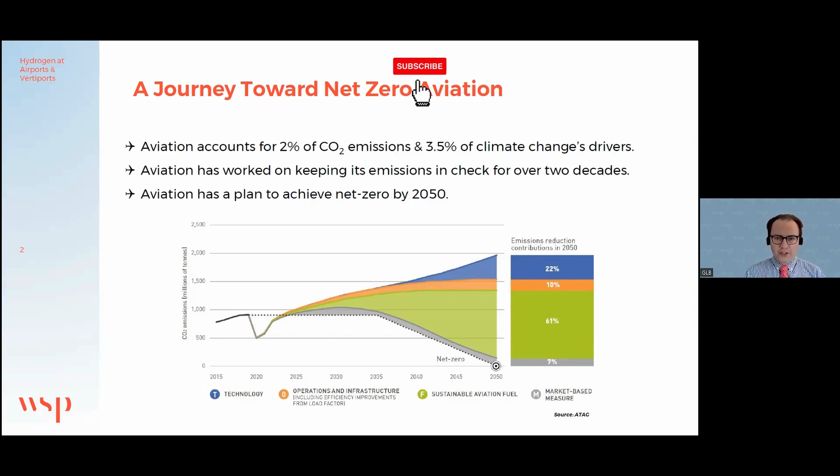Now if we look at the individual market segments, hydrogen could have a role to play in various different markets. Of course, electric propulsion systems - you're all aware that to do electric aviation, you can have a battery electric aircraft or fuel cell hydrogen electric aircraft. With advanced air mobility and also small general aviation aircraft, I think that's understated. Electric propulsion systems can really help the GA community decarbonize and also solve other issues, like lead emissions. So hydrogen fuel cell technologies can power electric and hybrid propulsion systems, EHPS. But also on the long-term horizon, hydrogen could be an alternative to traditional jet fuels and be burned in gas turbines, turboprops, or equivalent to our contemporary jet engines.

So, of course, we have all of these great aircraft technologies being developed, but that's not the end of the story. If you come with your brand new aircraft at the airport, and if the infrastructure, not only brick and mortar, but also policies and so on are not in place, well, hydrogen is just going to fail. So in order to have that aviation hydrogen ecosystem bloom and succeed, we need to take into consideration the infrastructure aspects of it and make sure that airports are hydrogen ready.

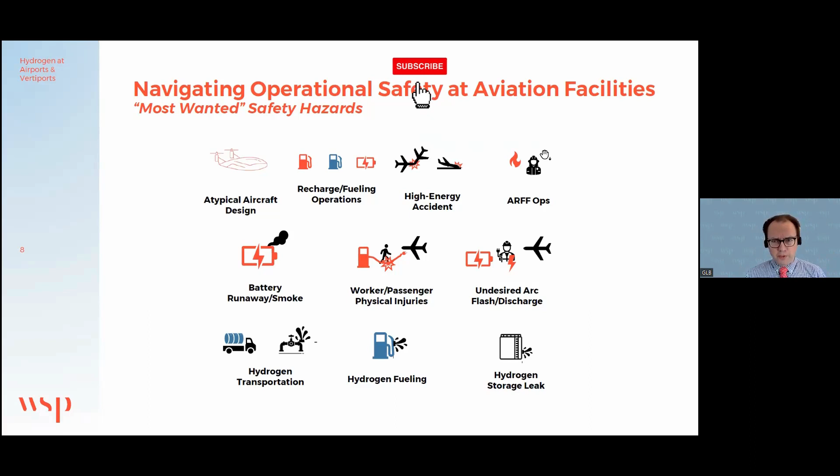Here you have that mapping of our most wanted safety hazards from atypical aircraft design. That's not hydrogen specific, but a lot of aircraft potentially using hydrogen as a fuel or energy vector to electricity have atypical aircraft configurations down to hydrogen storage leaks, for instance. Not saying this is hydrogen specific or that hydrogen is unsafe, but we need to address these into standards, practices, recommendations, and lessons learned, in order to make sure this happens in a safe and efficient way. I'm not going to go into details for each one of these most wanted, but I'm just going to go through three of them.

Number one, everything about hydrogen storage and distribution. For the general public and part of the aviation community, the moment you talk about hydrogen in aviation, a lot of people scream Hindenburg, right? This was nearly one century ago with a very specific aerial vehicle and an accident that happened in very specific conditions with a ginormous volume of hydrogen stored in very specific conditions as well. We are in 2023. What we're talking about for hydrogen in aviation today is completely different. This is not a balloon full of hydrogen. We're talking about safe hydrogen tank technologies that already exist conceptually speaking.

And what we see in tests involving these kinds of technologies on cars, run through a fuel cell electric propulsion system for a car, is that actually these technologies are so safe that they're even safer than conventional cars running on fuel. It's important to educate ourselves as a global aviation industry, and also to really do the groundwork when it comes to testing and confirming the level of safety of these technologies.

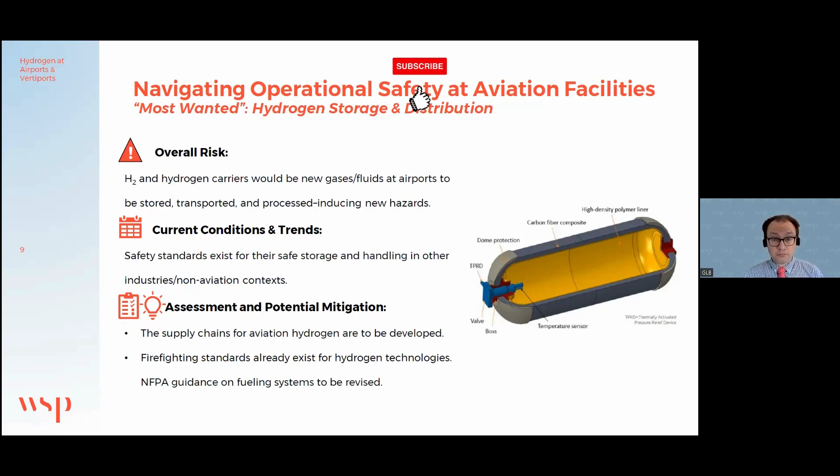We need to make sure that hydrogen on aircraft does not increase the severity of typical accidents. So if we think about a high energy catastrophic event, like the crash of an aircraft onto the ground at high speed, we cannot expect the hydrogen tank to withstand this kind of event and not have leaks, or we're talking about full destruction of the aircraft one way or the other. But here I'm talking about low energy or low intensity events.

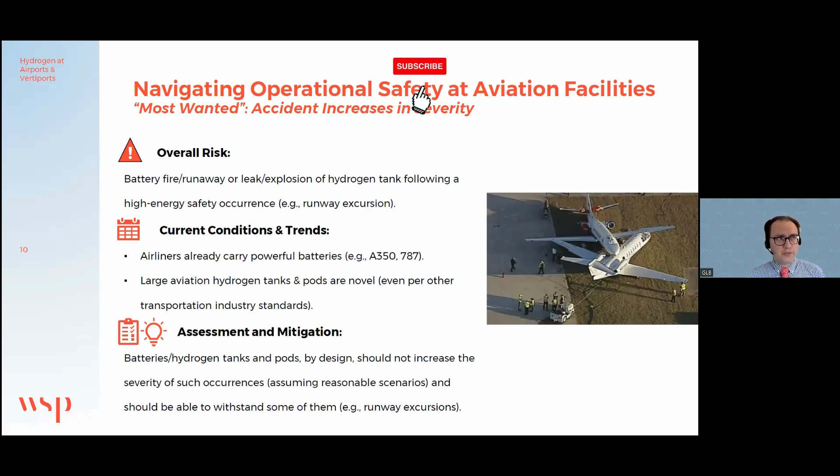For instance, a fuel truck colliding with an aircraft on the ramp, or even an aircraft doing a runway excursion. Today, typically runway excursions are not deadly, they are fairly mild when it comes to the integrity of the passengers and even of the aircraft. So we need to make sure that all these new aircraft technologies involving hydrogen do not increase the severity of these incidents and accidents. This is, of course, groundwork through industry standardization, work with the FAA and other regulators to make sure this happens. But this is doable as of today, based on what we see on the horizon in terms of aircraft technologies.

And one that's more airport or ramp operation specific is everything around atypical configurations. This is not specific to hydrogen per se, but also to aerial innovation generally speaking, is that a lot of these aircraft are not just conventional aircraft with a hydrogen tank in it, we're going to have atypical aircraft design features on it. Even the refueling or container exchange on the ramp is going to be something new in terms of procedures and technical features. We need to make sure that the ramp community and also the broader airfield operations community, including the ARFF staff, are trained and aware of all these new features in order to prevent incidents and accidents from happening in the field.

Earlier, I talked about these four keys to successful implementation. The first one was safety. We just talked about that.

The next one is compatibility. So when I talk about aircraft airport compatibility, it's all about answering that specific question: will it fit? You have an existing airport or vertiport. Will your new technology, your new aircraft type, fit in these operations, this facility, this infrastructure? And if not, what can we do in order to ensure that compatibility?

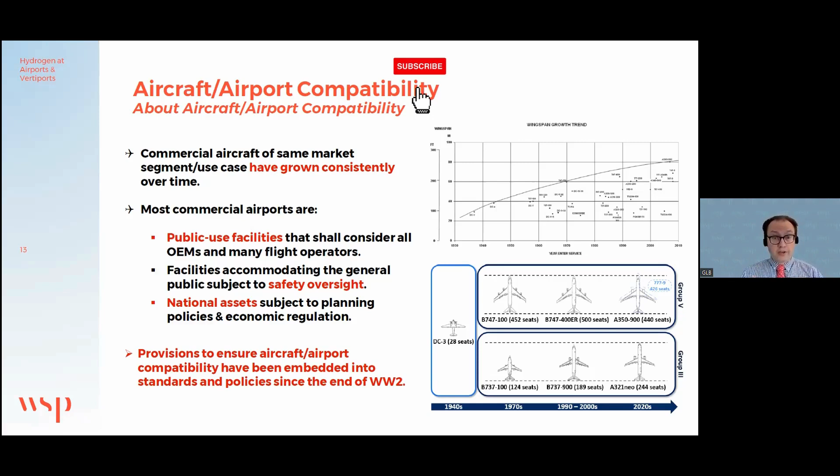We took nearly half a century to develop these forums and this process for aircraft-airport compatibility. We should leverage this in order to have, collaboratively speaking, this discussion between the airport community, OEMs, flight operators, regulators, ANSPs as well — the air navigation service providers — and so on, in order to all together facilitate that integration process.

And again, if you're not convinced that the ground infrastructure is important, I'm telling you, of course aircraft engineering is great, and it's amazing what we've been doing in terms of development of new aircraft design. But if we are not capable of also doing that same work of integration of these aircraft technologies on the ground, and setting the right policies, equipment, and infrastructure, it's not going to work, because these aircraft will not be able to fly anywhere.

When it comes to aircraft airport compatibility criteria, that comes from another research paper we presented at Forum 79 last year. This is a high level overview — the paper details all of these different criteria — an itemization of the different compatibility criteria to keep in mind when we look at integrating new aircraft design and new technologies into the airport setting.

In bold blue letters, I highlighted the areas, the domains, where hydrogen technology specifically might have an impact, or where we need to direct our focus when it comes to discussing the integration of hydrogen technologies into the airport setting.

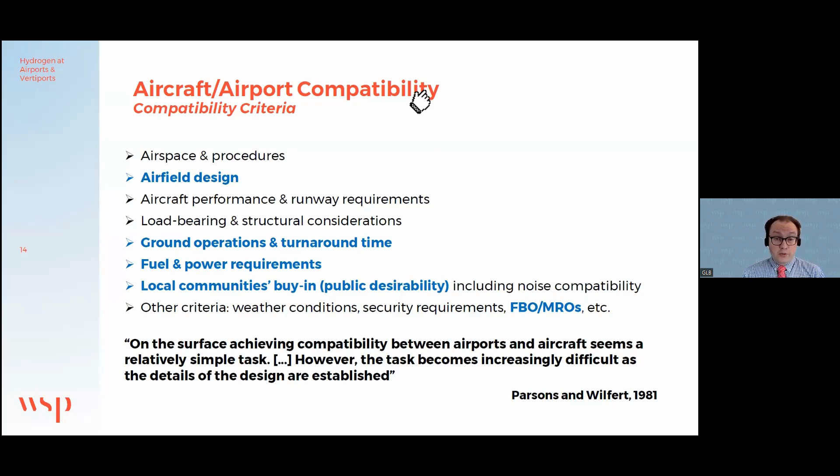And again, aircraft airport compatibility is all part of developing new aircraft technologies and running a new aircraft program. There's this great quote that I borrowed from two gentlemen from 1981 — they were actually part of McDonnell Douglas at that time — and I think they summarize everything when it comes to aircraft airport compatibility. It's at the core of the success, the commercial success and the operational success, of a new aircraft program, I believe.

So how to bring hydrogen to the final aviation user? Basically today, there are two ways to do so. The first one is to bring containers with hydrogen already packed into the aircraft and you swap containers. The second one is to refuel the aircraft with hydrogen from trucks, or maybe at some point in the future with a hydrogen fueling system. Why not? Like we do for conventional fuel at large hub airports, okay?

And of course, a lot of questions behind in terms of airport planning and design, but also supply chain on how we bring that hydrogen from the production site, that could be at some point at the airport, at least for some applications, to the final aviation users. And here also, everything has to be built, right? Because hydrogen is something fairly new in aviation.

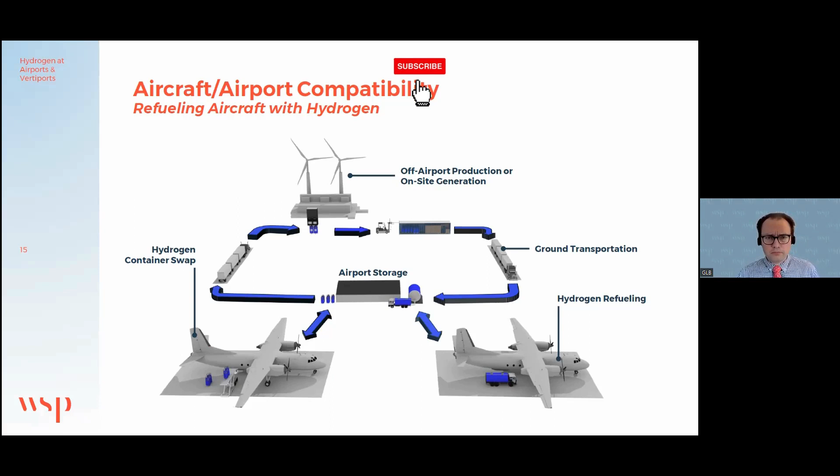In terms of supply chain, I try to keep up to date this graphic along the way. Of course, the purpose of this graphic is not to say that all of these different supply chains have to be implemented at each individual airport. The goal of this graphic is to depict all the different supply chains that are available, being developed, or being thought of as of today, from the production to the final aviation user. And when I keep saying aviation user, it can be an aircraft, it can be a ground support equipment, can be a ground vehicle, or it can be another airport application.

Like for instance, I was mentioning earlier today, potential backup generation based on hydrogen fuel cells, power packs that are based on fuel cells. That's to me an aviation user as well.

And you see that, of course, we can achieve this using hydrogen, but also we can use hydrogen carriers. Here, the idea is that you have another molecule. It's not hydrogen, but it's a chemical compound with a lot of H, a lot of hydrogen atoms on it. And the production and transportation of that hydrogen carrier may be more interesting, or easier, or cost competitive, depending on the market and the use case, than doing the same directly with hydrogen.

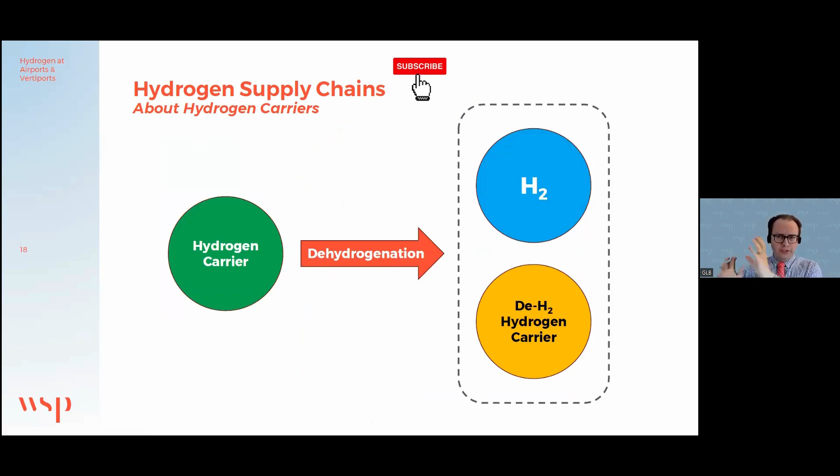You bring your hydrogen carrier to the airport, and at the airport, you're going to dehydrogenize that molecule in order to have on one side your hydrogen, on the other side the byproducts that you might want to use locally for another purpose, or bring back to the production site in order to rehydrogenize all these little guys. So again, this is the high-level schematic version of it. You have your hydrogen carrier, you dehydrogenize at the airport, and you get your H2.

If you don't want to do that, if we want to produce and use directly hydrogen, well today we have a problem. Maybe something like nearly 75% of all the hydrogen produced around the world comes from hydrocarbon reforming. Basically you take a hydrocarbon chain or molecule and you break that at very high temperature in order to extract your hydrogen, and on the other side we have carbon monoxide. That's basically the main process used today to produce hydrogen, and it's not green at all. It consumes a lot of energy. It emits a lot of GHGs.

Now, if we want to go away from that and produce green hydrogen, one first step is, of course, you could try to capture all of that. Still the same process with reforming, but capture the carbon monoxide or dioxide and store it or reuse it. That's what we call blue hydrogen.

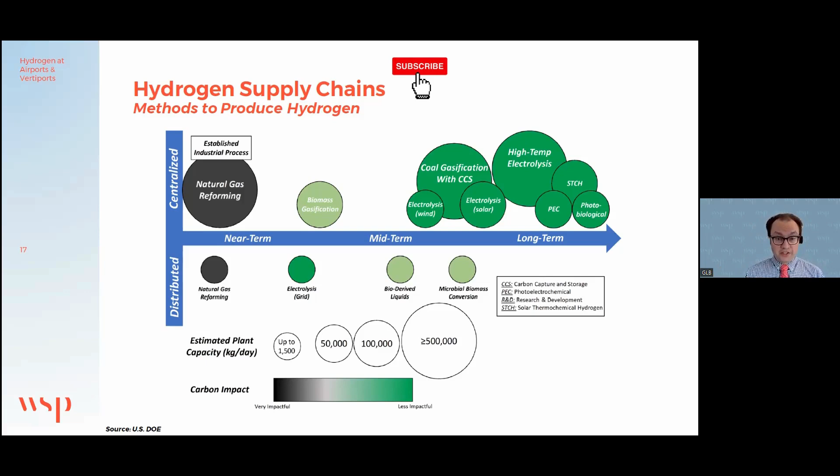And it's not just about counting the H on the molecule. Of course, we have to look at the energy it takes to run that process. We need to look at the cost of the industrial process for producing the hydrogen carriers and dehydrogenizing it at the airport for the final aviation user. We can talk also about the carbon and environmental footprint, and other criteria that can be used for decision-making purposes.

So that's an ongoing project. I don't have findings to share today, but I will be very glad to present during another High Sky Society webinar in the future on our findings.

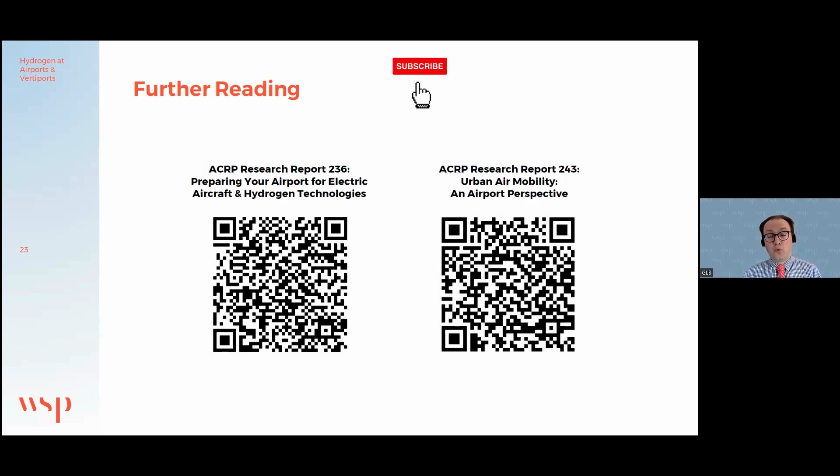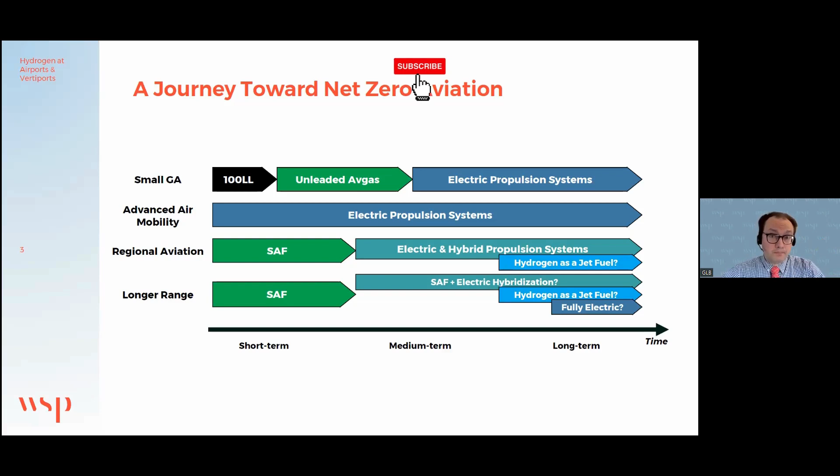Okay, great. Thank you. And for those of you listening, when Gail is saying RAM, he's talking about regional air mobility. So that's just what it means. It's regional air transportation, which we had a presentation on by Sergio Cacuta, I think it was 2 or 3 months ago on this topic. It was really insightful. So if you're interested in learning more about that, make sure to come next month because we'll tell you where to access all that information as well.

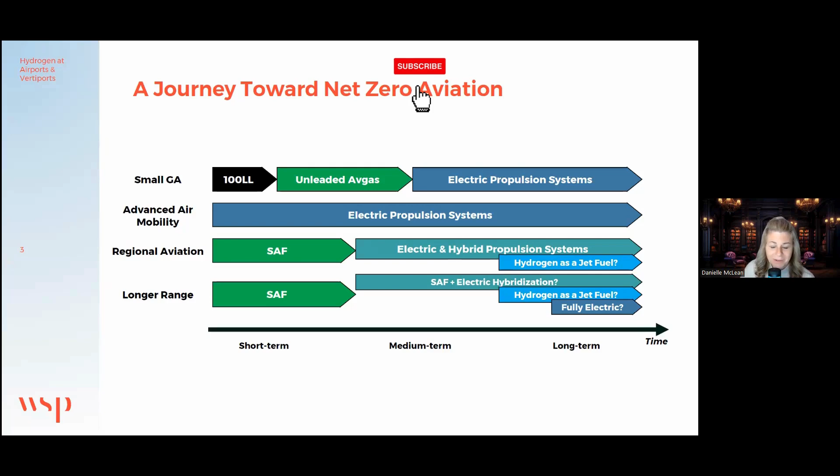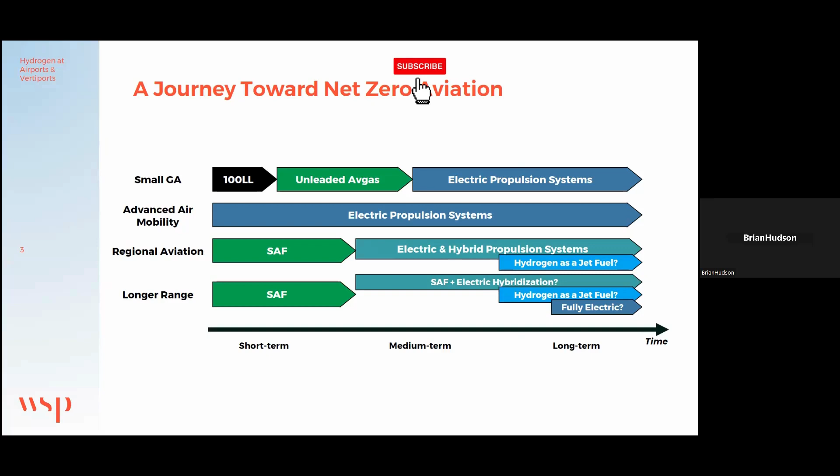Actually, I didn't have a question. I was just responding to some of the questions in the chat about the standards for aviation and hydrogen. So I thought I'd throw a link out there that would link some folks to the ISO hydrogen technologies that's going on.

Thank you for sharing. Yes, and I don't see the link. I see you said hubs will produce H2 gas feedstock. Maybe I need to scroll. I think it's 3 comments from the end. Okay, thank you. I'm not down far enough. And thank you, that's a good point, actually.

And just very quickly, you mentioned ISO. I did mention SAE, FAA, and ASTM as well, I believe. Again, there are no aviation standards already available today for practitioners to develop these technologies and supply chains, but it's coming. It's a hot topic in all these standardization organizations. You see all these big names in their respective fields either revising or developing new standards for facilitating the integration of hydrogen in aviation.

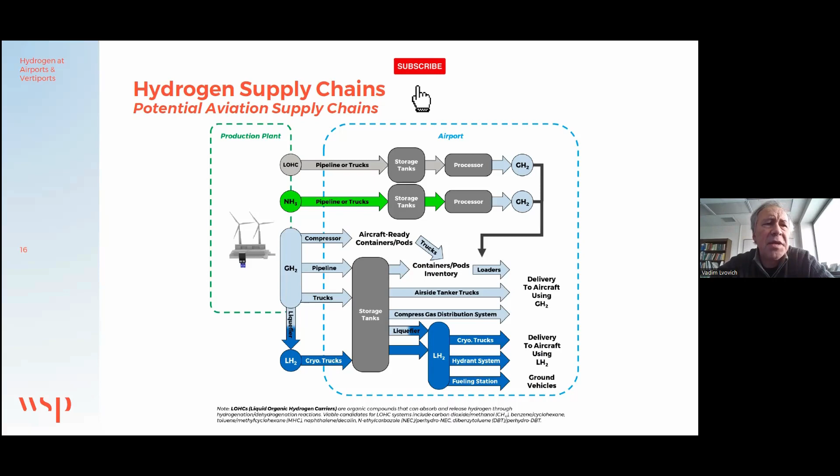I missed the very beginning of your presentation. I thought it was a very good, thought-provoking presentation overall. But I wanted to catch up on something you discussed toward the end. Of course, the presentation is about reconfiguring airports to make hydrogen available at the airport. However, it was also noted that hydrogen aviation, which is the primary user of that airport, is about 30 years away.

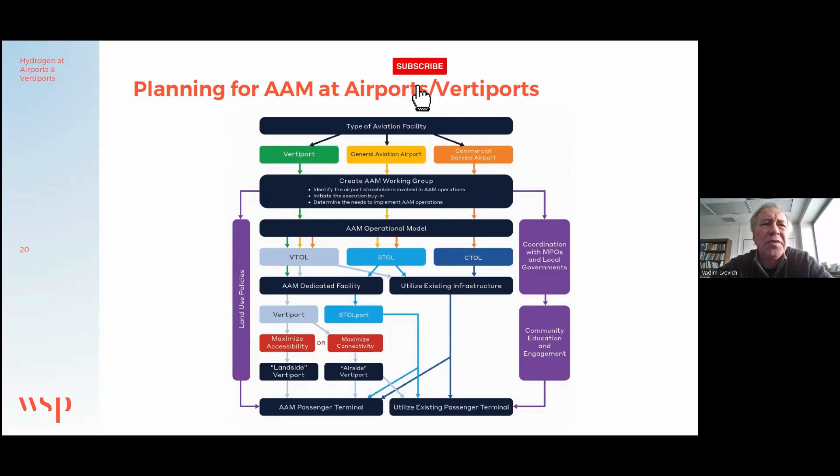So my question would be, if we develop hydrogen infrastructure and make hydrogen available at the airport, what makes the airport so attractive for other, smaller-scale, non-aircraft-related applications that could enable the airport to become a hydrogen user in the relatively near future, not 30 years from now? Because airport is essentially for transportation, for aviation. If there is no hydrogen aviation immediately that can take advantage of the provided hydrogen facilities, what other applications can the airport foster in order to bridge that time lag or gap before hydrogen aviation arrives, whatever that might be, a couple of decades.

No, thank you Vadim, this is a good question. I did talk a bit about that at the beginning of the presentation, but we can discuss more. Your question is completely valid and legitimate, because we were talking about that a couple of questions ago. If we want hydrogen to be successful, or if we identify use cases in aviation where we really want to transition toward hydrogen, we need to create a supply chain, and for that supply chain to emerge, it needs to be commercially viable or commercially interesting for all the different stakeholders playing around hydrogen, especially producers, suppliers, and so on. So when we think about early adopters of hydrogen, small volumes, not every airport, specific flight operators at an individual airport, how can we make that interesting commercially speaking?

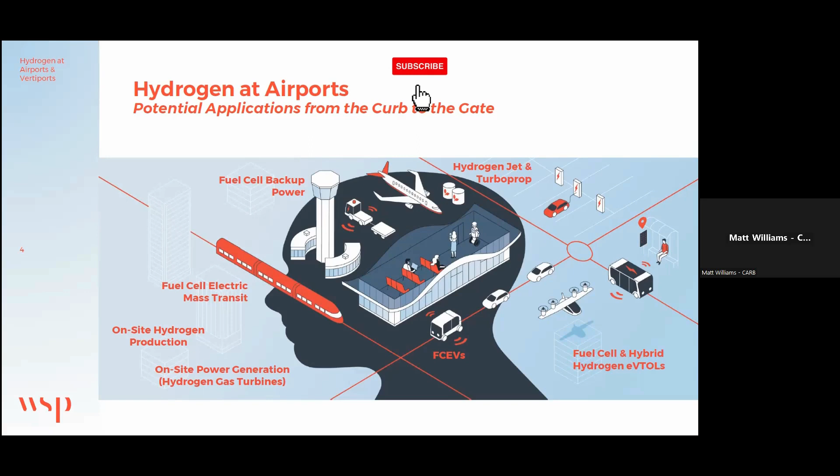I just want to selfishly say, sorry Gail, but I'm excited to see CARB here. Matt, thanks for coming. We had somebody from CARB present like 2 years ago. I would love to invite you to present in 2024 to our group. You don't need to be an expert on aviation, but this is exactly what this forum is for, so we can learn from each other. As you know, we're sort of a technical community, but kind of shifting, at least for me, especially as the CEO at High Sky, shifting my thinking from okay yes hydrogen can do all these amazing things, but what are the economics and what does that look like? So I would love to follow up and chat with you about that.

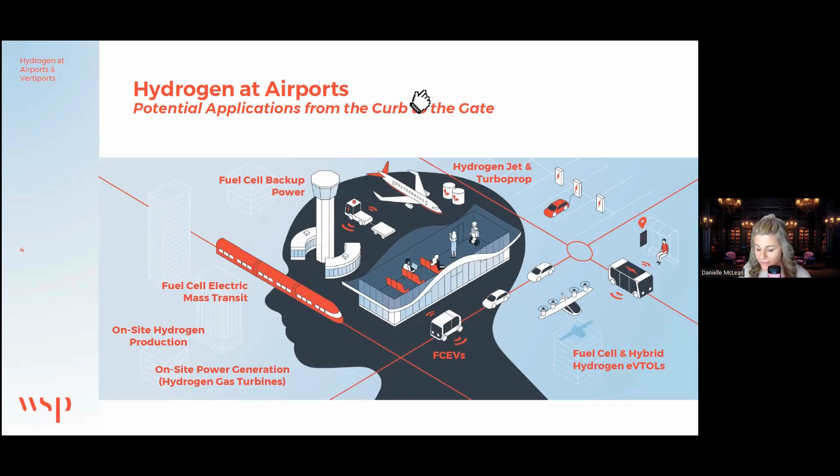Gail, I'll give you a chance to reply. Danielle, I will be very interested in watching this presentation actually. So yeah, please shoot me an email, Matt, d@highsky.net, I'll stick it in the chat. Would love to get you on in 2024. And Gail, Danielle, thoughts on some of the players, especially legacy ones with the millions of dollars to invest now, who would be good first conversations to help guide our strategy?

First people that come to mind are... and we're at the top of the hour. We may need to talk offline. I don't want to keep everybody's time, but why don't we hop on a call later this week? Does that sound good? Sure. Yeah, okay cool, okay awesome.